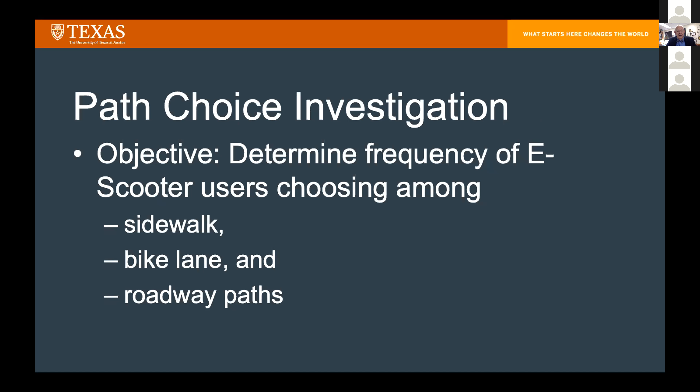So, as I said, when we started this, the basic idea was to try to figure out where e-scooter users ride their scooters. We obtained a lot of data, which I'll talk more about in a moment. The primary objective of the research was to determine what fraction of e-scooter usage occurs on sidewalks, what fraction on bike lanes, and what fraction on roadways. We went a little further with that, which I'll talk about more in a moment.

We had several primary data sources. One, the city of Austin requires that all e-scooter vendors be regulated by the city, and the city requires they keep records of trips for all trips. So we were able to obtain about 80,000 e-scooter trips made over about a year. That represents, although it's a large number, a very small fraction of the total e-scooter trips. By the way, we know exactly how many e-scooter trips are made because they're all recorded. So we had trip trajectory data from one e-scooter vendor representing about 80,000 trips. We also got GIS, Geographic Information System, inventory data for infrastructure, amounting to about 11 million location points. Then the trick was to match these two things together.

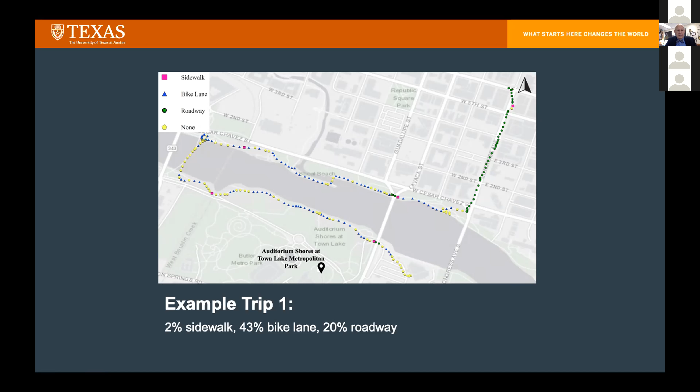Here's an example of what we did. From the data recorded by the city for every e-scooter trip, we could track that trip and, using the infrastructure database, determine whether it occurred on a sidewalk, a bike lane, or a roadway. Here's an example of a trip that begins on the south side of Town Lake, travels along the lake, crosses a bridge, and comes back. For this trip, about 2% of the total distance was on a sidewalk, about 43% was on a bike lane, and about 20% was on a roadway. As I noted earlier, our concern is really the fraction of all e-scooter travel that occurs on sidewalks and roadways, because of a speed differential there.

Here's another example. Unlike the first one, about 60% of this trip—which is a little bit south of the lake—was done on a sidewalk.

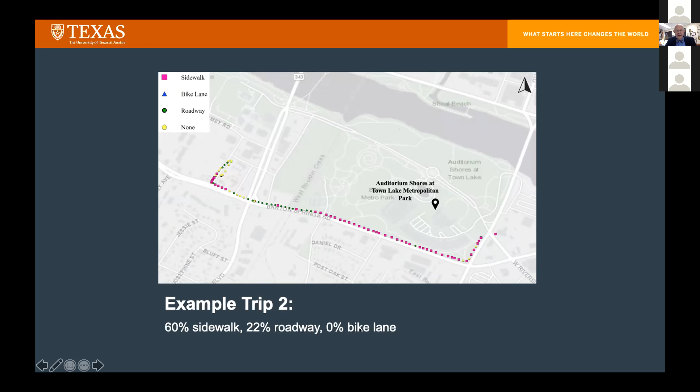22% was done on a roadway, and practically none of it was done on a bike lane.

We were able to compute vehicle miles of travel by e-scooters. Here is the summary for all the trips, the 80,000 that we tracked. Notice that roadway represents by far the largest number of vehicle miles, 26,000 vehicle miles of e-scooter travel on roadways. Sidewalks represent the next highest total, about half of the roadway total. Bike lanes represent the least.

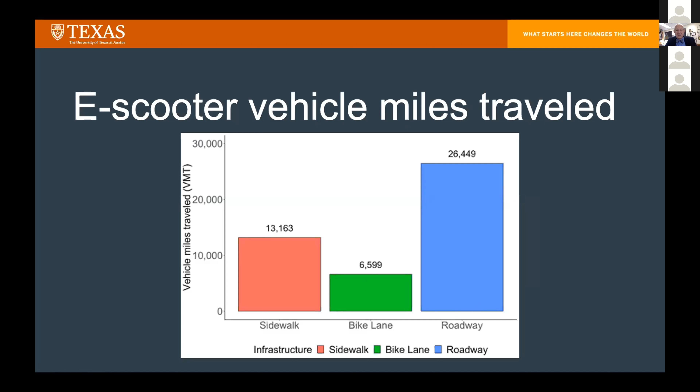We looked at the classification of the roadways used by the e-scooters, ranging from local streets to interstate highways - actually a non-zero number, which is surprising. Notice that this big bar in the middle is principal arterial, and that is very concerning because principal arterial streets have the highest volume of traffic and the highest speeds, so the likelihood of crashes is probably higher when scooters use principal arterials than any of these lesser classes. We would hope they'd operate predominantly on local streets or collectors where volume and speeds are lower, but they tend to choose principal arterials that have the highest speed and traffic volumes.

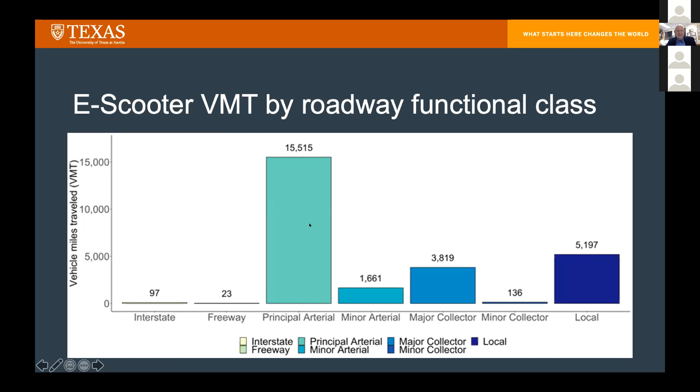When they travel on bike lanes, they don't necessarily choose the best bike lanes. I think it's pretty much just choosing a bike lane because it happens to be available, and they don't tend to worry a lot about riding comfort.

So we've actually divided all of our bike lanes - we have a fairly significant network of bike lanes in Austin - and we divided the bike lanes by comfort level. This is a very comfortable situation, probably an off-street kind of bike lane, very, very comfortable. And this is a very minor trail where you'd have to hold your hand in front of you to keep the bushes from hitting you in the face. They choose something in the middle, typically. By far, most of the e-scooter trips are made on bike lanes that have medium comfort level, which is interesting.

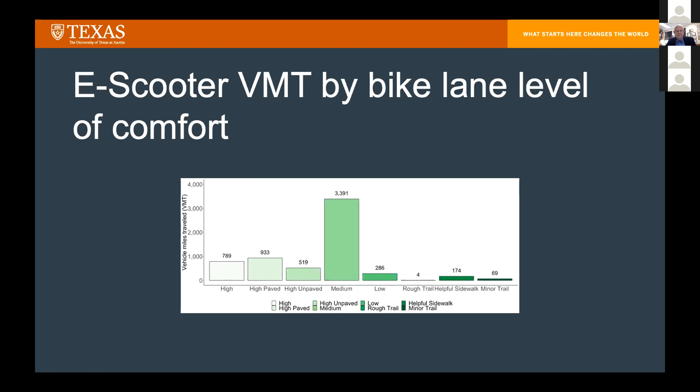We plotted vehicle miles of travel by traffic zone area, with sidewalk travel on the left, bike lane travel in the middle, and roadway travel on the right. All three of these tend to show essentially the same pattern: more vehicle miles traveled in the central portion of the city, significantly fewer vehicle miles traveled as you go outward, and UT campus is somewhere right in this concentrated area.

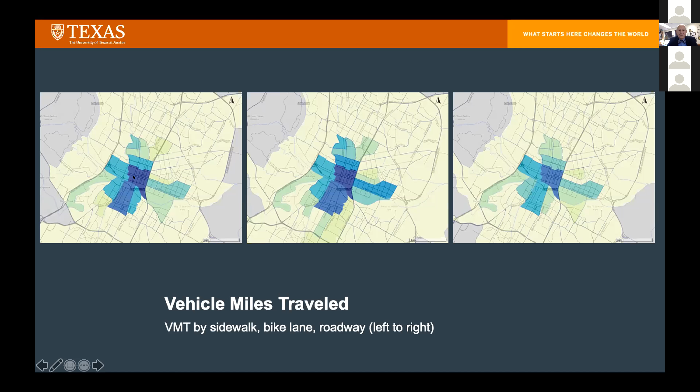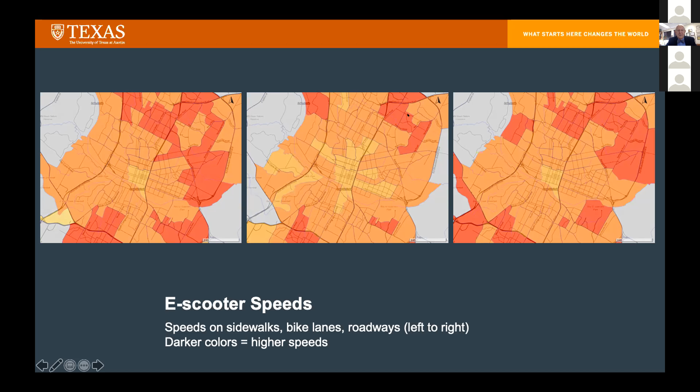We also compare speeds here: the red box is sidewalks, green is bike lane, and blue is roadway. Pretty much whether it's weekday or weekend, it looks like the fastest speeds are on the bike lanes, and that's fine because that's really where we'd like for the e-scooters to be.

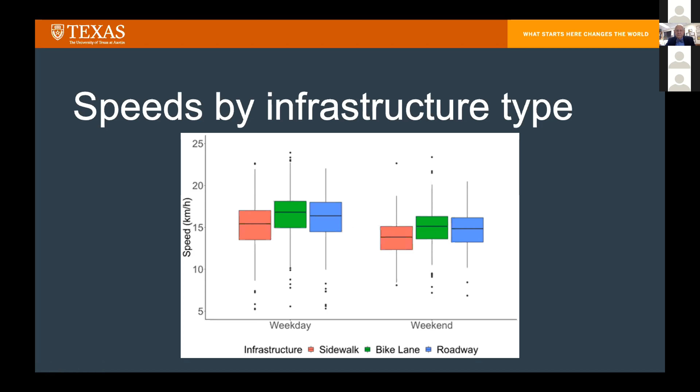Here's a more detailed look at weekday along the top versus weekend, for time of day. On weekdays, and pretty much the same story for weekends, speeds are highest during the AM peak time. Again, that fits with the fact that most of these trips are related to work trips.

Again, the AM peak tends to have the highest speed, but the fact of the matter is, if you look across this whole box plot chart, everything is pretty much in the range of about 15 to 20 kilometers per hour. Weekends, the speeds are a little bit slower, but again, not a lot of difference. So my assumption is that when most people ride an e-scooter, they just go as fast as it will go.

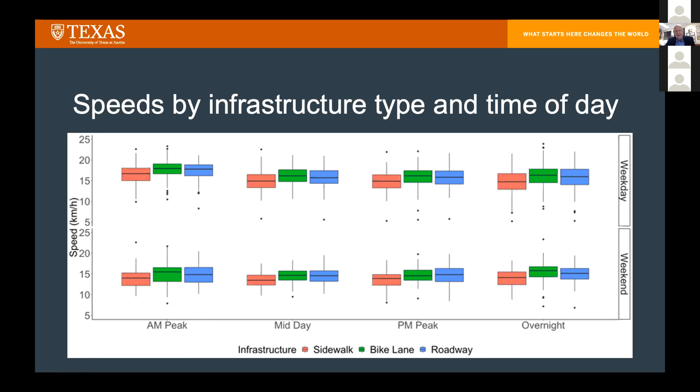We looked in more detail at the speed variance across infrastructure. We did an analysis of variance of speeds among the three infrastructure types, and there's a statistically significant variation across infrastructure types. Again, we looked at the box plots, and we could see that, but from a practical point of view, the variation is really not very large.

There is a statistically significant variation among times of day. We looked at that also. And for weekends, same thing - significant difference across infrastructure types and significant difference across times of day. But again, from a practical point of view, there's really not a lot of difference.

We went a little further and used Tukey's test to compare bikes versus sidewalks, and again the difference is statistically significant. Compared roadway to sidewalk, again statistically significant difference, and so forth. This is for weekdays, similar pattern for weekends. Although there are statistically significant differences among bikes, roadways, and sidewalks, the fact of the matter is the speeds are very similar all the way across the board.

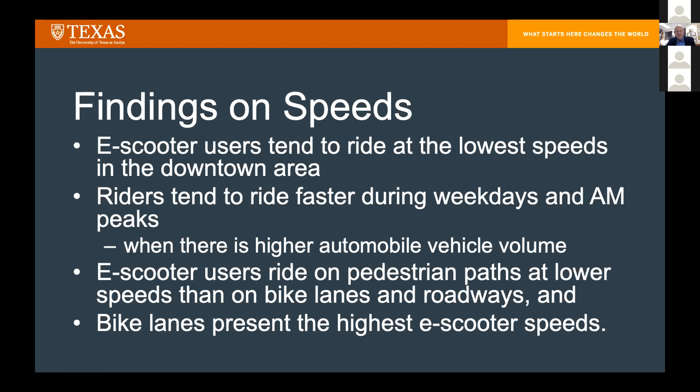The good news out of this whole thing is that bike lanes have the highest e-scooter speeds, and that's where we'd really like for the e-scooters to be. But again, as we hypothesized, a very large fraction, about half of the e-scooter trips are not made on bike lanes at all.

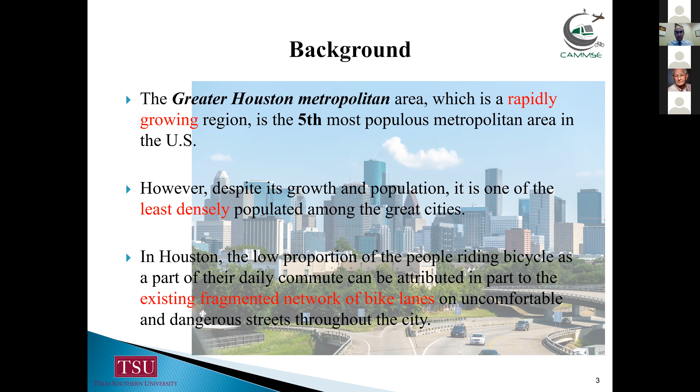It is the reason that even with an improved transit system, traveling and commuting in the city remains dominated by cars and automobiles. Some major cities have improved their first mile, last mile transit problem by motivating residents to use bicycles. However, in Houston, the low proportion of people riding bicycles can be attributed in part to the existing fragmented network of bike lanes, those located on uncomfortable and dangerous streets throughout the city. That's the reason that in recent years, the city has started planning bicycle infrastructure improvements to help make residents safer, healthier, with more bike-friendly infrastructures, and encourage more people to ride bicycles by improving the infrastructures. A few projects have started and already been completed during the last 1-2 years, and several other projects are in planning and design phases or under construction right now.

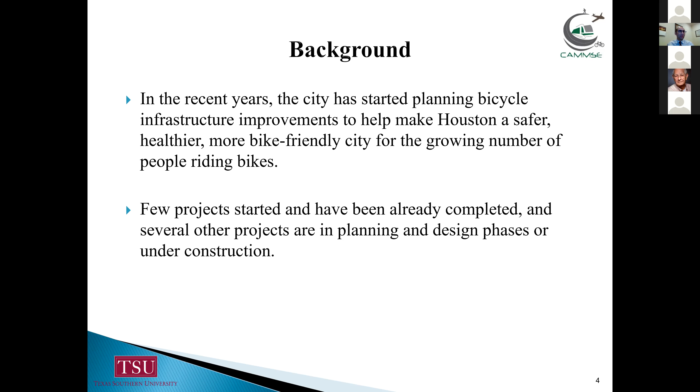Another focus of the city is investment in the bike share system in Houston. Bike share system, as you know, is a shared use of a bicycle fleet by individuals on a short-term basis. It has gained increasing interest in so many cities across the world and also in the United States. The bike share provides users the ability to pick up a bicycle at any self-serve bike station in the network of that city, and return that bicycle to any bike station close to their destination.

This bike share system has a couple of benefits. For example, it provides the first mile, last mile connection to other modes of transportation, filling the gap between trips that are too far to walk and not long enough to use public transit. It also reduces individual dependency on a car, and therefore saves effective travel time from congested traffic. We can say it also has a great impact on environments.

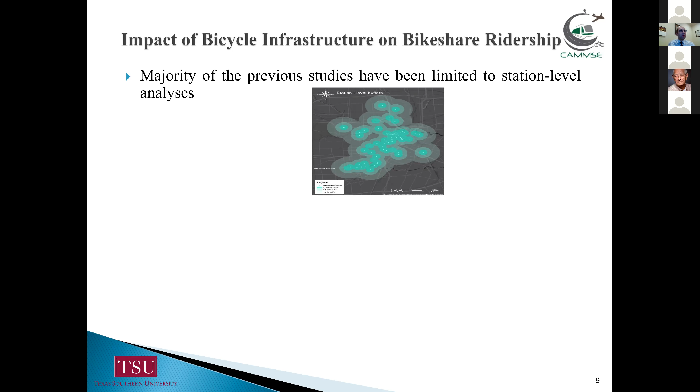Basically, we look at the buffer with a certain dimension, size, and with that we do the regression analysis, having some dependent variable, assuming that dependent variable is ridership activity, and independent variables are built environments that include the existing bike lanes, along with other variables in the regression.

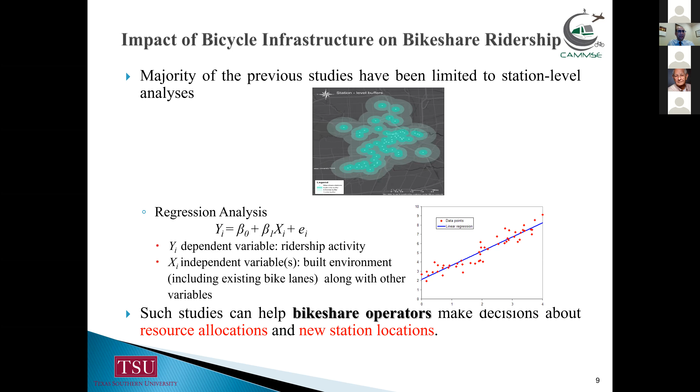By having the regression analysis, we can find how those variables have impacts on the ridership for each station. So such studies can help bike share operators mostly to make decisions about resource allocation, so they know in which areas they should have more bike stations or add newer stations, for example in some neighborhood that they haven't had before.

But sometimes it is required to know the relationship between the bicycle infrastructure and the bike share demand. Those studies measure the marginal effects of improving bike lanes on bike share demand at network-wide levels, not the station level, and it will be over time. For those types of studies, we should use time series analysis, not regression analysis.

Such studies can help planning agencies, for example cities, counties, or other agencies, make decisions about bike facility investments and improvements, and also prioritization — which types of facility they should improve. So basically the results of such studies are more useful for planning agencies rather than the bike share operators.

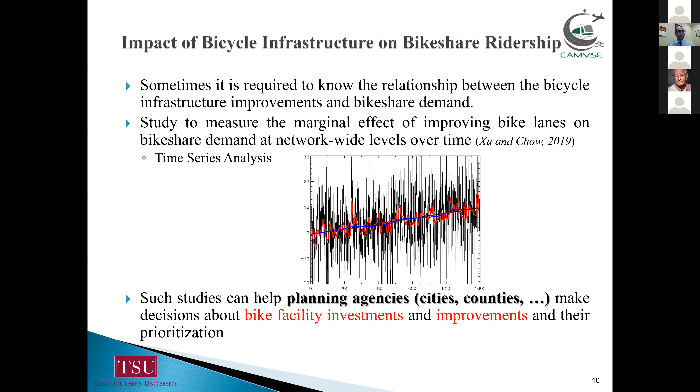So the goal of the study is to investigate the relationship between bike share average daily trips and the lengths of bike lanes in Houston. Basically, we look at the impacts of bike lanes on bike share activity at the network-wide level over time.

For achieving this goal, we have some objectives: we analyze the bike share trip activities overall, we model bike share average daily trips and related attributes based on the bike share trip activities, and also identify the important attributes that affect bike share demand.

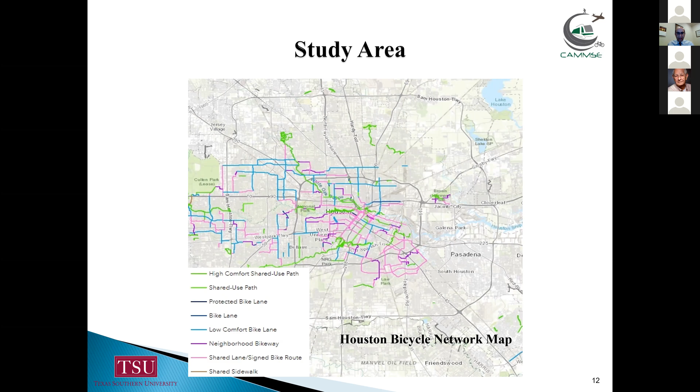For bike share ridership data, we got the data from Houston B-Cycle, the 2019 data. The data included trip ID, bike ID, user membership type, checkout date and time, return date and time, checkout station, return station, and trip duration.

Those were the information in the data. The daily data were aggregated to weekly level to allow for reaction time to the new bike lane improvements, because people may not be immediately aware of specific new bike lanes, and it takes some time to observe the influence in bike sharing ridership.

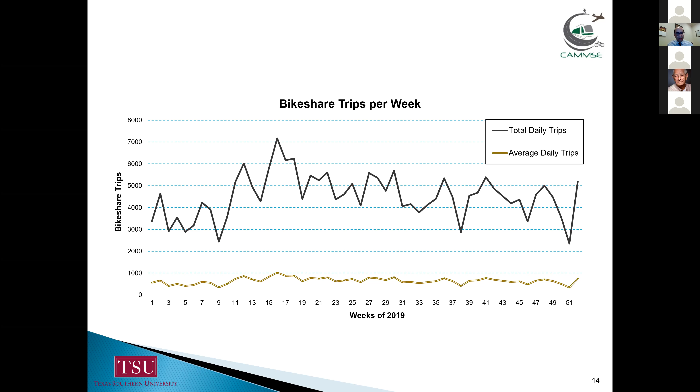This graph shows the bike share trips per week for the year 2019. The graph in black color shows the total daily trips per week, and the other graph is average daily trips per week in 2019. For bicycle lane improvements data, we reached out to the City of Houston and also Harris County.

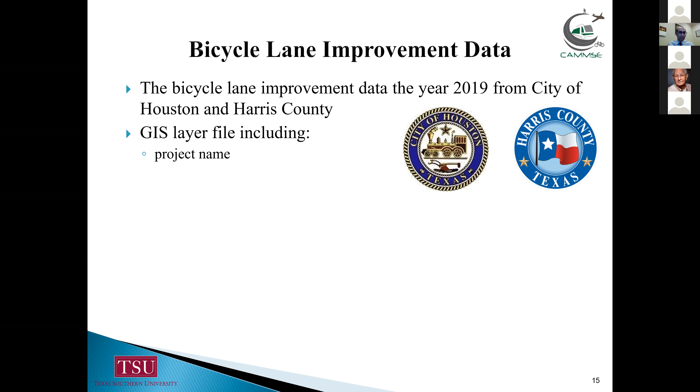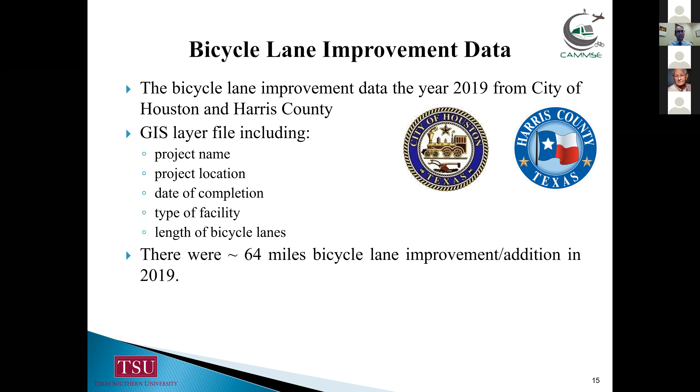We received the data, basically the GIS layer file that they had. From the GIS layer file, the attribute table of GIS, we extracted the project name, project location, date of completion of those projects, type of facility, and lengths of the bicycle lanes. When we calculated the total lengths, there were about 64 miles of bicycle lane improvements or additions in the year 2019, by the end of 2019.

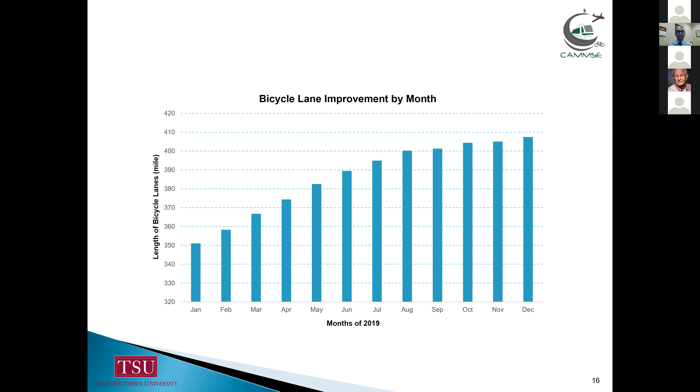This graph shows the bicycle lane improvements by month, every month in 2019 from January to December. Every month, the lane improvement includes new lanes and also improvements of existing lanes. Because we wanted to look at the weekly data, we changed it to weekly, showing every week how much improvement in the lanes we had for our project.

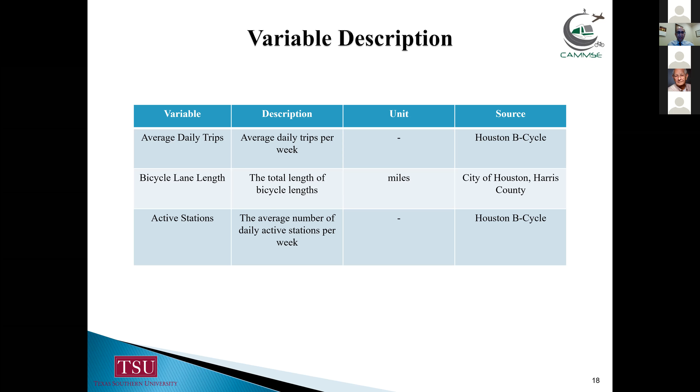This is the variable description. We had the average daily trips per week, bicycle lane lengths, the total lengths of bicycle lanes in miles, and also we looked at the active stations, the average number of daily active stations per week. So we model the time series, and we had the analysis.

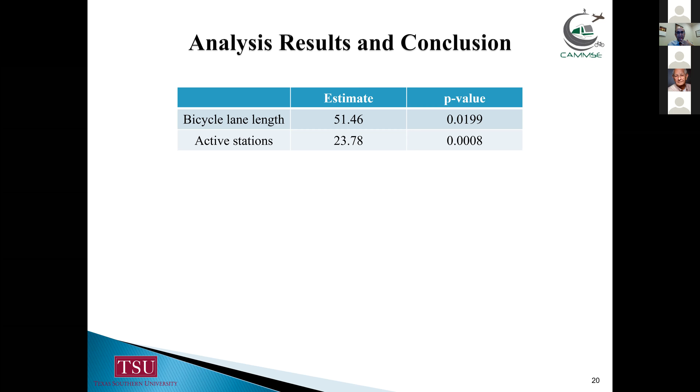The results: the independent variables, bicycle lane lengths and active stations, are here. I didn't include other parameters of the model in the table, just the independent variables. As you see, all independent variables are significant when we look at the t-test in the model.

Considering the t-test in the model for the 95 percent confidence level, their signs and magnitudes are as expected—positive signs. The length of the bicycle lanes and number of active daily bike share stations have positive signs, as you see here, meaning that bicycle lane improvements attracted more cycling. The result indicates that controlling for all other variables, one additional mile of bicycle lane

that was built resulted on average in 51.46 trips per day. If we multiply by 7, it gives us 357 weekly trips. These results give good guidance to the city planner to see how much investment in bike lane improvements will increase trips for the bike share.

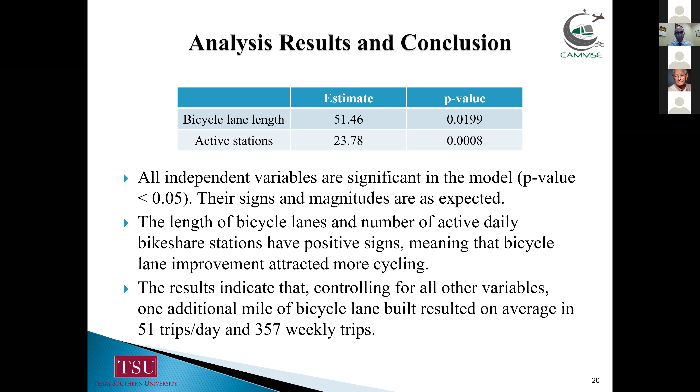So in our analysis, we actually missed the data parameters related to the weather. Basically, the weather variables were not included in our study, so that is part of the project that is ongoing.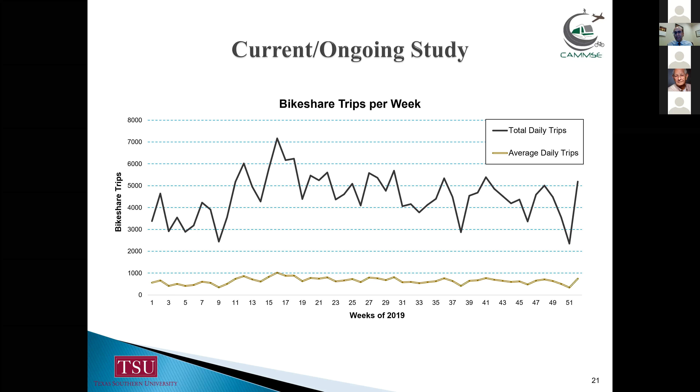We are including weather variables in our study right now. The other thing is, if we separate each graph—the black graph for total daily trips, and the other for average daily trips—into weekdays and weekends, you see different trends. We have more demand during the weekday versus weekend in terms of total daily trips.

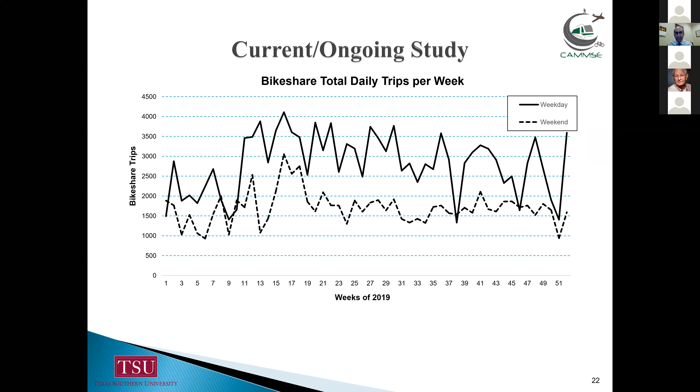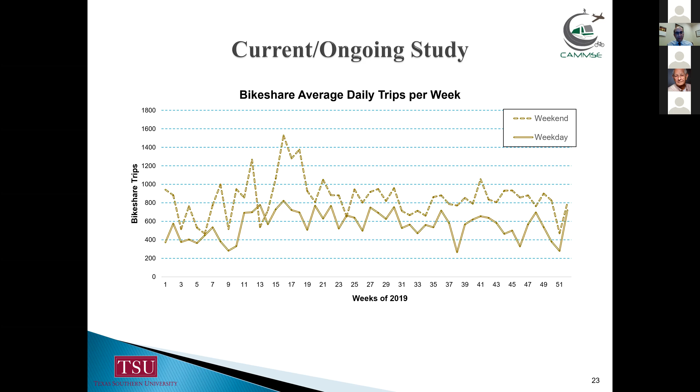If we look at the average daily trips, we see that on weekends we have more demand per day. This means more people use bicycles during the weekend, probably in the parks for recreation. That made us think about filtering the data into two different data sets, one for weekday and one for weekend, and doing more analysis.

So to summarize, we are using different weather variables right now as an ongoing study—factors for weekly ridership such as temperature, precipitation, and wind speed. Those are the parameters that we will have in the model as independent variables, in addition to the bike lane and the active bike stations.

The data is filtered into two data sets, one weekday and one weekend, and we will do a time series analysis to see what the impacts of the variables will be on ridership.

With this, I conclude my presentation. If there is any question, I would be glad to answer.

This is Randy. I'm curious, can you hear me? Yes, Dr. Machemehl. Do you have e-scooters in Houston?

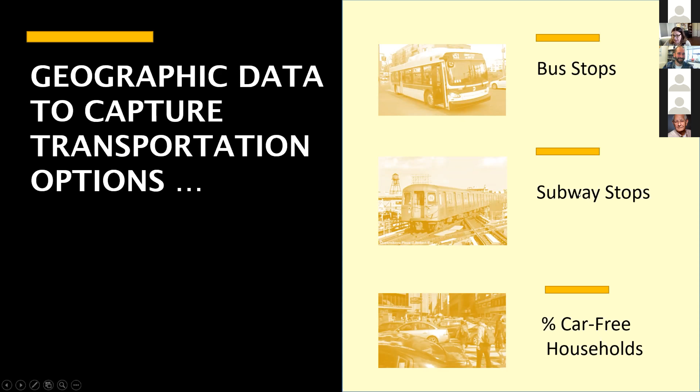So what we did is we tried to work with what we had in order to find out what was going on with these trips. And we decided to put together a geodatabase. So we used transportation options in the taxi zone - we counted the number of bus stops, the number of subway stops, and the percentage of car-free households.

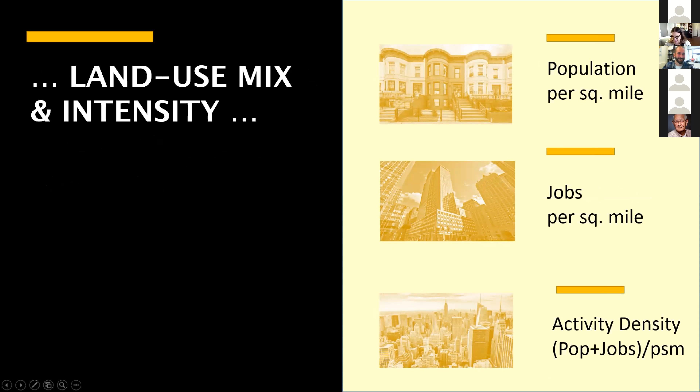We combined this with variables that represented land use mix and intensity - things like population per square mile, jobs per square mile, and overall activity, which was population plus jobs per square mile. We then also added some socioeconomic and demographic characteristics, fairly standard data from the US Census. And we put all of these into a geodatabase.

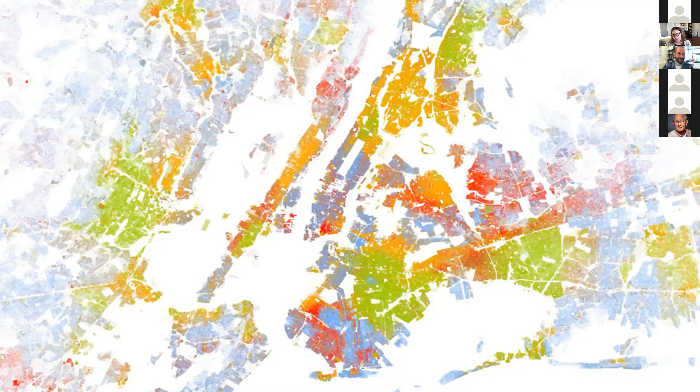So we wanted to create a typology to look at all of these variables together. Once we compiled all the data into a geodatabase, we did some factor analysis to understand the correlation among the variables. We then did cluster analysis to create groups of taxi zones that are more or less similar to one another in terms of the factors that were generated.

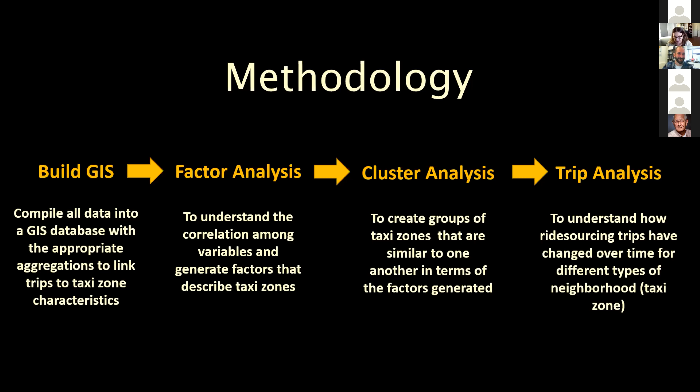Cluster 7, I'll talk about briefly - few subways, a little bit of transportation, $65,000 median household income, primarily Black, and 39% households which are car-free. This contrasts with cluster 4, which has a median household income of $36,000, 53% Latino, and 68% households car-free. They're all slightly different compositions.

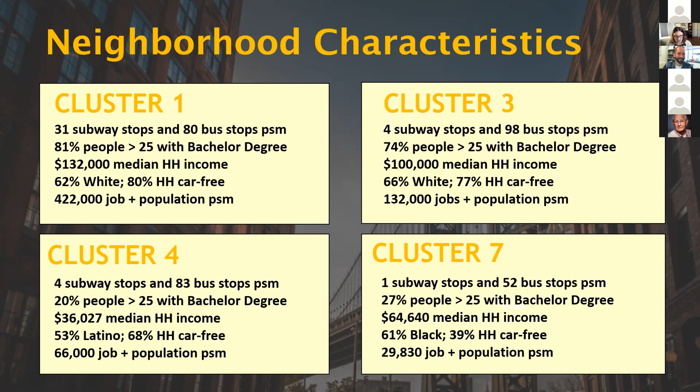This is what we were thinking about them in terms of - cluster 4, very low income Latino households in residential areas with little subway access. Cluster 7, fairly low income, but they're in transit deserts.

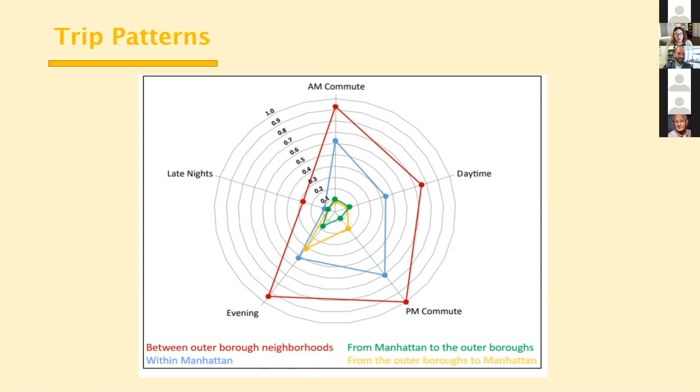So this again reinforced the idea that ride sourcing may be being used for commuting in the outer boroughs.

So we had one of our students, Annika Maher, who has since graduated, do some analysis of the data in Python and come up with some time of day patterns by aggregating all of the trips. Altogether there were about 10 million trips, so it was quite a lot of data processing.

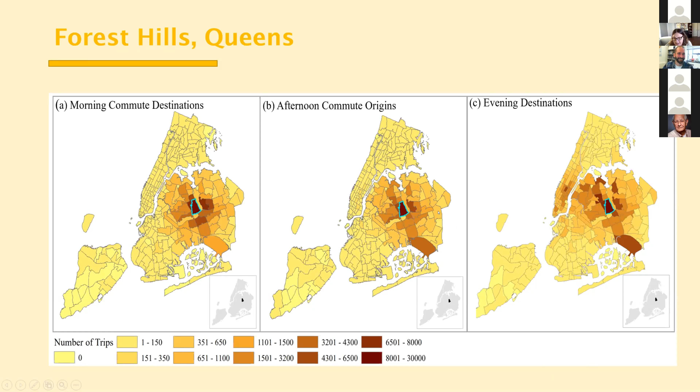So we did have a follow-up planned to this study, and the question we were addressing was going to be: who was using ride sourcing in low-income neighborhoods? For what purpose? What transportation options is it replacing? How do people pay for the services? And how exposed are they to surge pricing?

So we did the IRB paperwork for this, and we were working with the Tri-State Transportation Campaign and set up a bunch of focus groups. Unfortunately, the research was supposed to take place over spring break of this year, and we were unable to do it because of the pandemic.

But we're hoping to get that back up and running once we're able to run the focus groups, because we think this mixed methods approach to looking at this question is what's really needed because of the limitations on the quantitative data side. So what we're planning on doing is focus groups in these neighborhoods to get some texture.

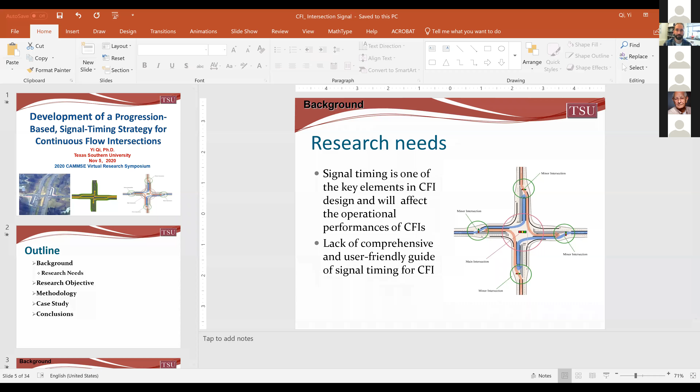Okay, can everyone see the presentation? Let me go back to... okay. Can you see the screen? Sure can. Thank you very much.

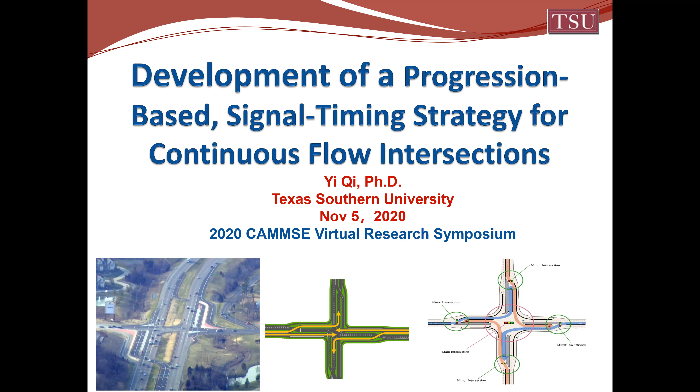Okay, good morning everyone. Today I'm going to introduce the research we have done related to signal timing design for continuous flow intersections. If you remember, last year in the symposium I presented the safety performance research we conducted for continuous flow intersections. Our team continued working on this innovative intersection design, and we have some interesting results about the signal timing for this type of intersection, which I'd like to share with you today.

Here's the outline for my presentation. First, I will give you a brief background introduction.

Start your video. Start my video. Okay, everything was okay, I'm still in the line. Hello. Okay, can everyone still hear me? Yes, yes, yep. I saw a message pop out, so did I drop?

Okay, good, thanks. So I will talk about the background of this research, basically why we do this research and the needs for this research. Then we will talk about our research objectives and the methodology we use, and also conduct a case study to show the results of our research. Then I will present the conclusions.

So first, let me give you a brief introduction about what a continuous flow intersection is. It's also called a displaced left intersection. This is an innovative intersection design, mainly for intersections that have heavy left turn volume. The basic idea is before the left turn vehicle reaches the intersection, at some upstream location we relocate this left turn traffic to the most left side of the street.

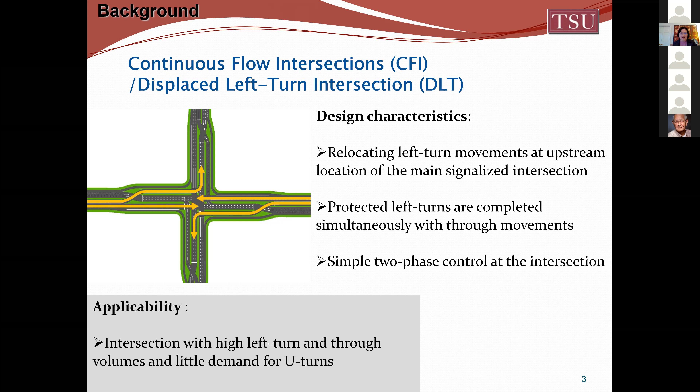This new design was first implemented in Mexico in the 1980s. Right now in the United States we have more places using this design — about 12 states use this innovative intersection design. As I introduced last year, there are 2 locations in Texas, and San Marcos recently implemented this new design.

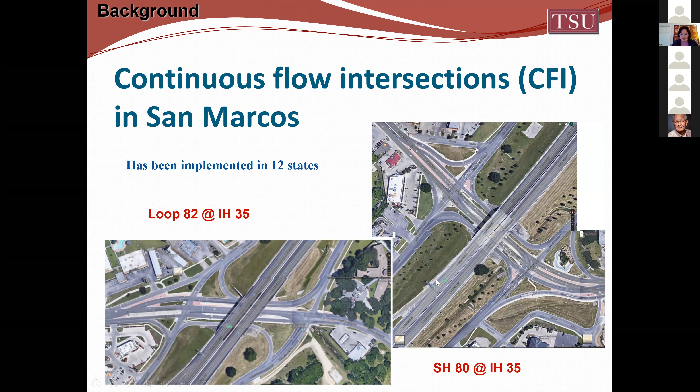So let's talk about why we need to do this research. When we worked on this new intersection design, one thing we found is that signal timing is very important for this new design, because there are 5 intersections in this whole system — we call it the system. There's the main intersection in the middle, and then the location where we move the vehicle to the most left side.

Some studies call this the left turn crossover location; in this study we call it the minor intersection. This minor intersection also has a signal. We have 4 minor intersections around the main intersection, so the whole system involves 5 different intersections.

These 5 intersections have to be signalized coordinately in order for them to work with each other. Otherwise, queues will build up between the intersections, blocking the entrance and operation of the intersections, making the whole system not work as expected. That's why signal timing is very important.

But because this new design is relatively new, especially in this country, there's a lack of comprehensive or user-friendly guidelines for signal timing design for this new intersection type. There is some research, like an FHWA research report about innovative intersection design. They talk about signal timing a little bit and give some example signal timing, but there's no detailed steps on how they develop the signal timing — it's very general guidelines.

Okay, so this is the one thing. Then we also searched some research papers, trying to find from the journal papers what people did for this signal timing.

So what we found is most existing studies, the academic studies, use optimization-based methods to design the signal timing for this type of intersection.

So there's some problems with this kind of approach. When we review these papers, they usually set up an objective function to minimize the delay or maximize the capacity for the intersection. Then they set up a bunch of constraints, like the capacity constraints, the traffic flow relationship constraints, the geometric design constraints, and also the signal timing constraints.

So sometimes there's like 20, 30 constraints, sometimes 100 constraints. The model itself is very complicated. I think it's too complicated for the transportation practitioner to use this model.

Another problem with this academic model is they mainly base the objective function on calculating delay, and this delay was calculated based on some analytical models. This analytical model was not designed for calculating the delay in such complex intersections. They are mainly designed for simple conventional intersections, so they have lots of assumptions to simplify the model.

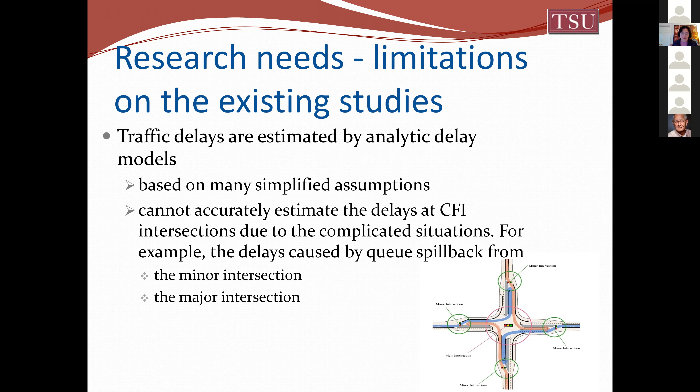And they cannot model the queue spillback between the intersections, like the queue spillback from the main intersection to the minor intersection, or the queue spillback from the minor intersection to the main intersection. All this delay caused by this kind of queue spillback was not able to be accurately modeled by these delay models. So the base for the optimization model may not be very solid, and it causes the optimization results to not be very reliable. So this is one problem we find.

The major problem we find, because for this design, as I mentioned, there are 5 different intersections and they are very closely spaced, is that signal coordination is the most important factor we should consider when designing the signal timing for the whole system. The whole system has to be operated so people can go through these multiple intersections with less delay and less stop. Like if a vehicle approaches the intersection and sees green lights, they expect they can continue moving through the whole intersection. If you let them stop, it will cause lots of problems.

As I mentioned in my safety study, if they already passed the left-hand side and expect they can continue moving, but all of a sudden they stop at the main intersection, it causes rear-end crashes, and also causes people to run through the red lights. So these are the things we find for the signal timing design problem for this type of intersection.

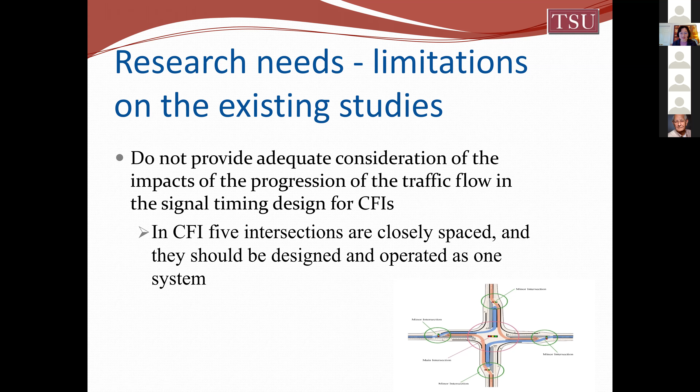So the objective for our research is to develop a new strategy to design the signal timing for the continuous flow intersection. We mainly consider the traffic flow progression, the coordination between different intersections.

Okay, so this is the key idea. For this type of intersection, there's lots of different traffic flows, but there are 2 major traffic flows. One is the displaced left-turn traffic flow - as I mentioned, the left-turn vehicle will move to the most left side, then move and make a left at the main intersection. The other traffic flow is the through flow from the main intersection. So in this graph, I indicated these 2 major flows in one direction, but actually this applies to all directions - all 4 directions have these 2 major traffic flows.

So the whole idea of our design is we want to make sure these 2 major traffic flows can go through the intersection with less delay and less stop. That means they can pass the intersection on all green lights - if they see one green light, they will reach the next intersection and also see green lights. So that's the whole design idea.

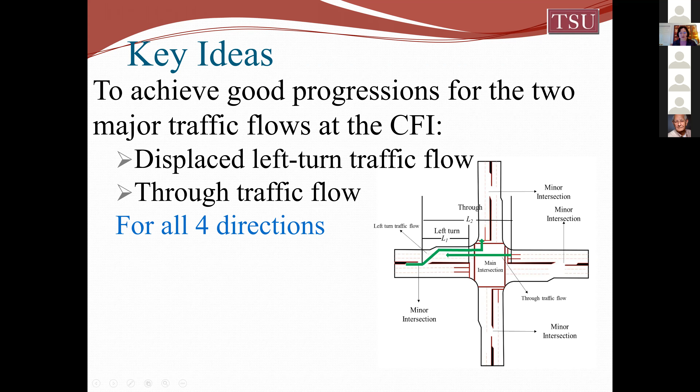Okay, so in order to make it work, the methodology we chose is a very traditional signal coordination analysis. Usually signal coordination analysis uses this diagram, but we found that for this particular situation, we need to analyze the coordination not just for one movement or one approach - we need to analyze the coordination for different approaches and different movements. So we found a method used by one TTI research study. They developed a report to analyze the signal coordination between diamond interchanges. We know diamond interchanges also have multiple intersections - two intersections very closely spaced.

So they use this signal timing diagram-based time-space diagram to do the coordination analysis. We think it's a very useful tool, so we used the same method in our study to analyze the signal coordination between the two intersections.

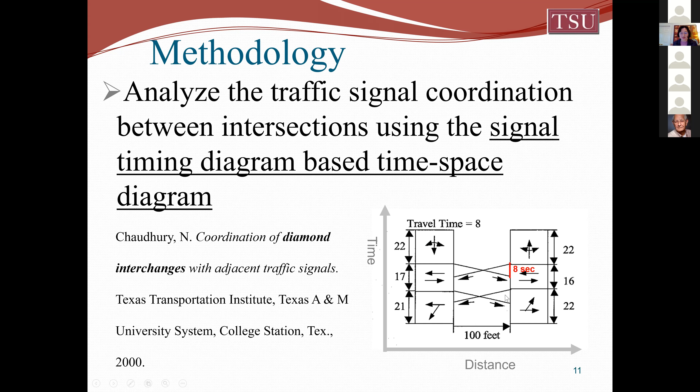I will not go into too much detail about the methodology. I don't want to bore you, but just give you the main idea. Basically, we analyze the signal coordination for these two major flows. First is the left traffic flow, so we draw the signal diagram.

What we got is, in order for the traffic flow to move through the intersection, in the perfect coordinated condition, when the left flow moves through and crosses over the minor intersection, they will move to the main intersection. Then the green lights for the main intersection will turn on when they arrive at the main intersection. So we need to coordinate these two intersections in this way.

So the offset is determined by the distance for the vehicle to travel from the minor intersection to the main intersection. This L1 is the distance they travel from the minor to the main intersection. So this offset was determined.

Then when we consider the next traffic flow, the through traffic flow, we find that the offset was also determined based on the travel time the vehicle travels through the main intersection to the minor intersection. We want the vehicle to pass the main intersection, and when they arrive at the minor intersection, they also can see the green lights turn on. So we determine the second offset like this.

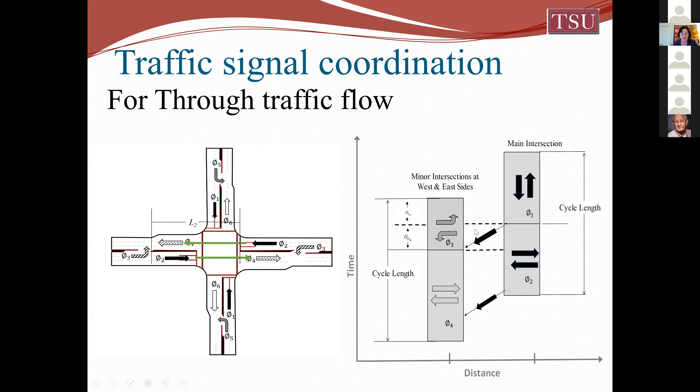So we put both diagrams together. What we found is, if you want ideal coordination for these two major flows, basically the signal timing for the left-turn phase, the amount of green time we give to the left-turn vehicle to move to the most left side in this minor intersection, was already determined by this offset, by this coordination requirement. So the length of this phase will equal the sum of both travel times.

The travel time from the minor street to the main street, and the travel time from the main intersection to the minor intersection. So we determine the sum of this travel time, and we also deduct a little bit of time called the advanced green time, to make sure the green lights turn on a little bit early, so the vehicle will see the green lights before they arrive at the intersection, so they don't need to slow down, so they can continue moving at their speed to pass the intersection.

So the major idea is, if we fully consider the coordination between these two intersections, at the minor intersection, phase 3, the phase that moves the left traffic to the left side, is totally determined by the travel time between these two intersections. So this is the idea.

Based on this idea, we can design the signal timing for the whole system. But this idea also has something we need to consider, some constraints, because we determine the signal timing based on coordination, not based on traffic volume, for the minor intersection. For the main intersection, we still base it on traffic volume to split the green time. But in the minor intersection, we determine the green time mainly based on signal coordination.

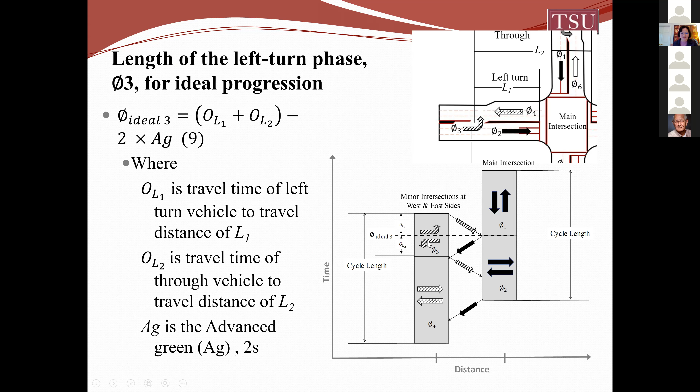Then here comes constraint one, which we have to consider. We want to make sure the green time we provide in this minor intersection can handle all the left-turn traffic, that it's enough for the demand to move through the left. So we have to check if this constraint was met or not. But in most cases, this constraint will be met.

I'll talk about this in our case study, because the travel time between these two intersections is usually based on a 200 or 300 distance, so you double the travel time. The travel time is not very short, and it will provide enough green time for this left movement. So this is the first constraint we should check.

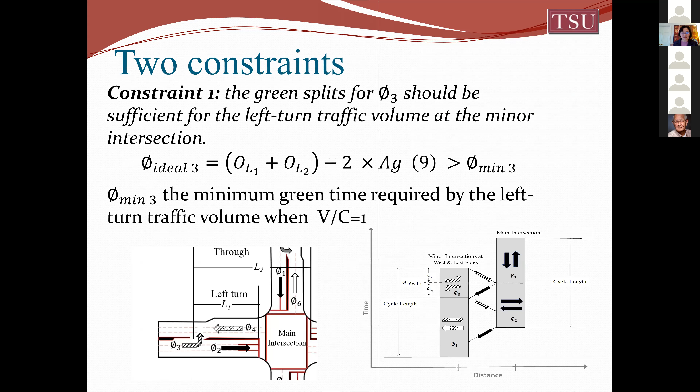If this constraint is not working, we have to increase the left turn time, either letting the left turn start early, or letting the left turn phase extend a little bit. In both cases, we don't have ideal coordination between these two intersections, so the vehicle either has to wait at the main intersection, or the vehicle from the main intersection has to wait at the minor intersection. But it depends on which movement has more traffic, more congestion, so we determine which direction we should move the phase to make sure it can accommodate all the left vehicles.

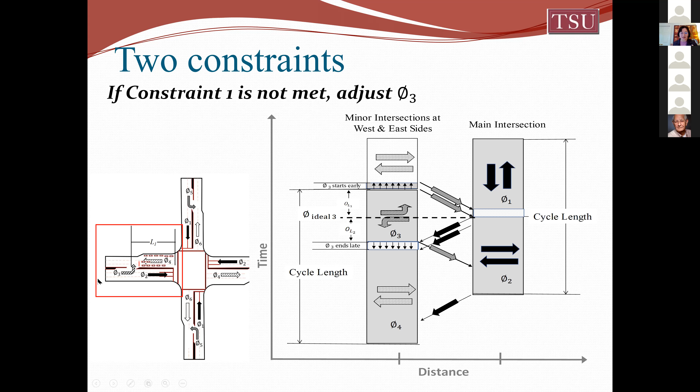Okay, so this is constraint one.

Then the second constraint, as we see, the left phase was determined by the coordination at the minor intersection. At the minor intersection, the signal split is between the left turn and the through movement, only two movements split the signal phase. So if we design the phase for the left turn based on the coordination, at the same time the phase for the through vehicle is also determined, because the cycle length should be a fixed number for the whole system. If you want them coordinated, you have to have a fixed cycle length. So in this way, the phase for the through traffic is also determined by the signal coordination.

Then the question is: is phase 4 big enough to handle all the through movement? Because mainly the through movement comes from the major intersection for phase 2. The phase 2 through movement from the main intersection will arrive at the minor intersection as the phase 4 movement. So we want to make sure phase 4 at the minor intersection is bigger than phase 2, so that all traffic moving through the main intersection has enough green time to move through the minor intersection. This is the second constraint we consider in our signal design.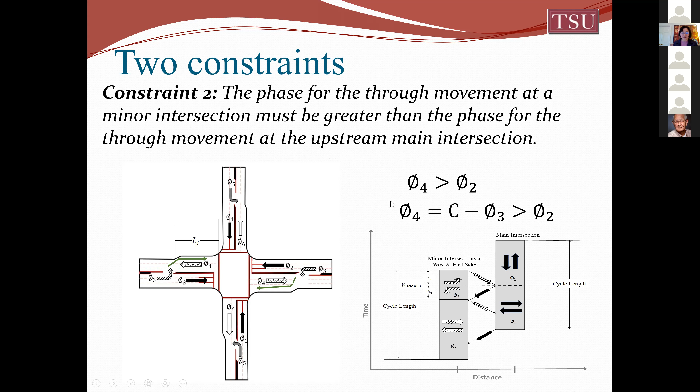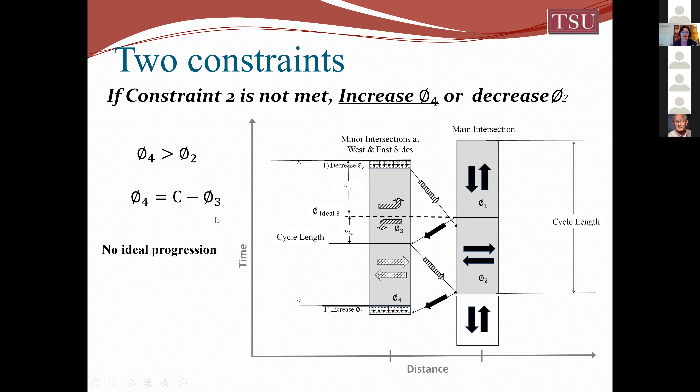If this constraint was not met, we could either increase phase 4 to make it bigger than phase 2, or we can reduce phase 2. Either approach has some side effects. If we do the first approach, we will not have ideal coordination - you can see there are some gaps, so the coordination is not perfect. If we reduce phase 2, that means we control the demand in the main intersection, which may cause some delay there.

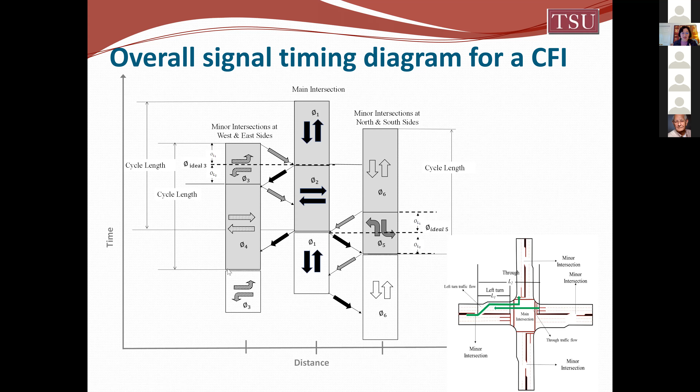Okay, so this is the procedure we proposed, and we developed a step-by-step flow chart to show how traffic engineers can follow this procedure to design a particular signal timing for continuous flow intersections.

Okay, so in order to test if our idea works or not, we did a case study. The case study uses an example provided by Synchro, a signal timing design software that has examples for different types of intersections. For the continuous flow intersection, Synchro also provides an example with detailed traffic volume and geometric design. It also provides a pre-configured default signal timing for this intersection. The default signal timing is not optimized, but it works at this location with reasonable delay and congestion.

So we used this example location to test our idea. What we did is change the signal timing from the default to the signal timing plan we developed according to our method. We also wanted to test the optimization-based method, because Synchro itself has optimization that allows you to optimize signal timing according to traffic delay - based on a traffic delay model, it optimizes the signal timing for the intersection. So basically we compared the signal timing for this intersection using Synchro's optimized timing versus the signal timing we proposed.

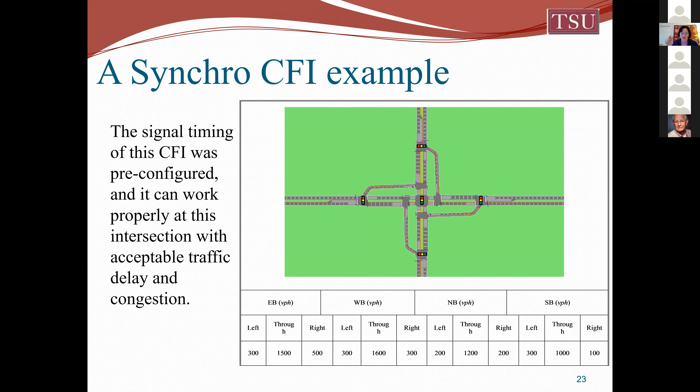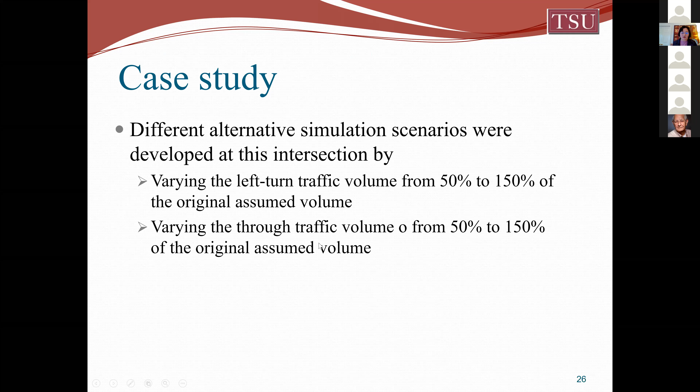Since this is just one case, we want to see if our strategy works in different conditions, so we deliberately changed the traffic volume at this location to see if the signal timing works at a congested or less congested intersection. We changed the left turn volume from 50% to 150% of the original value, and also changed the through traffic volume from 50% to 150%.

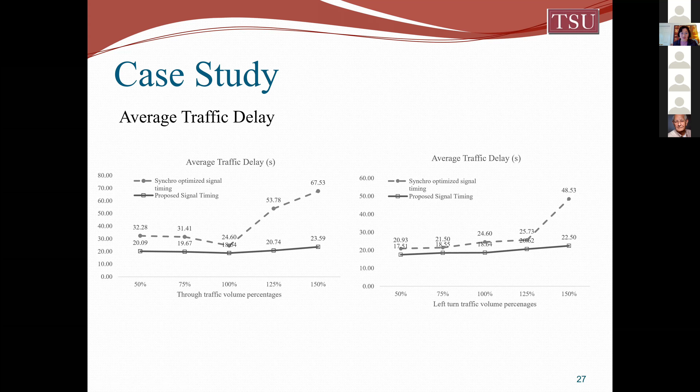It's because we consider the coordination, so there's less chance the queue will build up between the two intersections and block the operation of each intersection. That's why our signal timing works better than the optimization-based signal timing.

We also did the same comparison for travel time and queue length. All these results indicate our signal timing works better.

For all these scenarios, we find the perfect coordination condition we mentioned, the equation, constraint one, is met. Even when we increase the left turn to 150%, we still meet this constraint one.

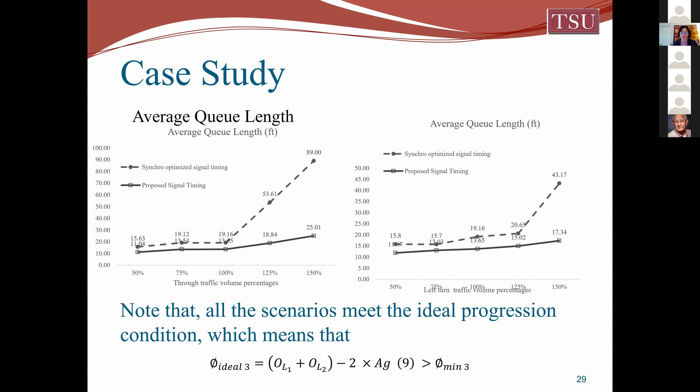So we wanted to see, if this constraint was not met and we don't have perfect coordination, whether the solution we propose to adjust the signal timing would still work. So we continued increasing the left turn traffic volume to 300%.

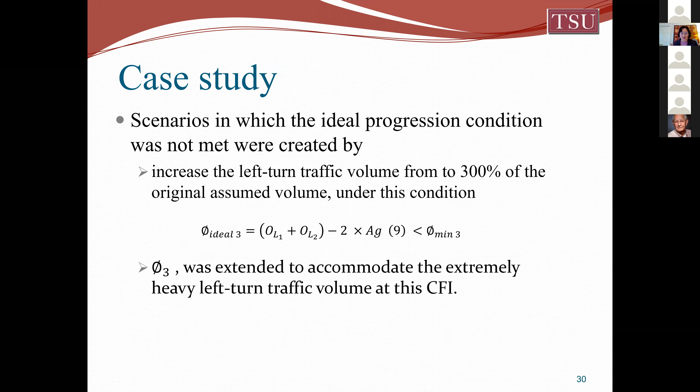At this point, constraint one was no longer satisfied, so we had to adjust the signal timing for phase 3, the left turn phase. Once we did this, we adjusted the signal timing according to the strategy we proposed.

We redid the simulation and the comparison, and found our model works even better than before. We have much less delay and queue length than the synchro optimized signal timing strategy.

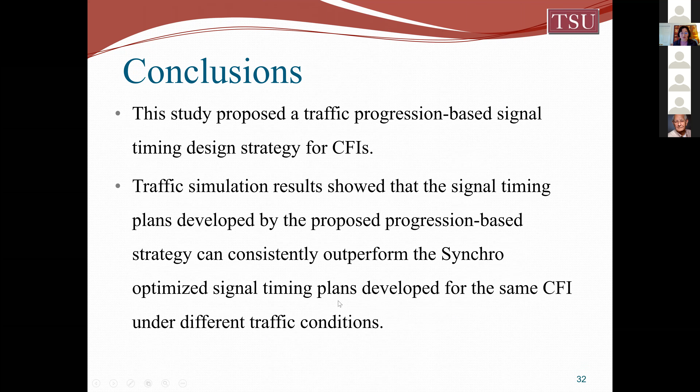All this testing indicates the strategy we proposed works very well for this case study. So here is the conclusion: we did the case study and showed the results. Our results consistently outperform the synchro optimized signal timing developed for this location under different traffic conditions.

The key point I want to make is that this study verified our idea: traffic progression, or signal coordination, should be the most important factor when designing signal timing for continuous flow intersections. In this innovative design, there are 5 closely spaced signalized intersections that have to be designed to operate as one system. This way, vehicles can go through the whole system with less delay and fewer stops. That's the key point we want to make based on this research.

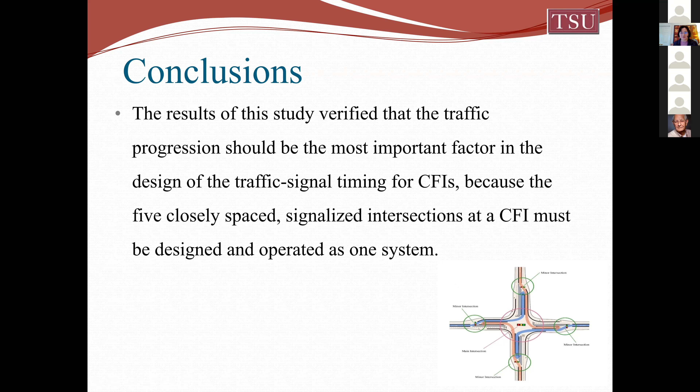This is Randy. Hey, Randy. I wonder if TxDOT is about to implement your progression concept.

I hope so. I want to promote this because we just finished this study and I submitted a paper. I also want to submit some results to the TxDOT people to let them take a look at it. Hopefully they will adopt it.

Great, great, nice work. Thank you.